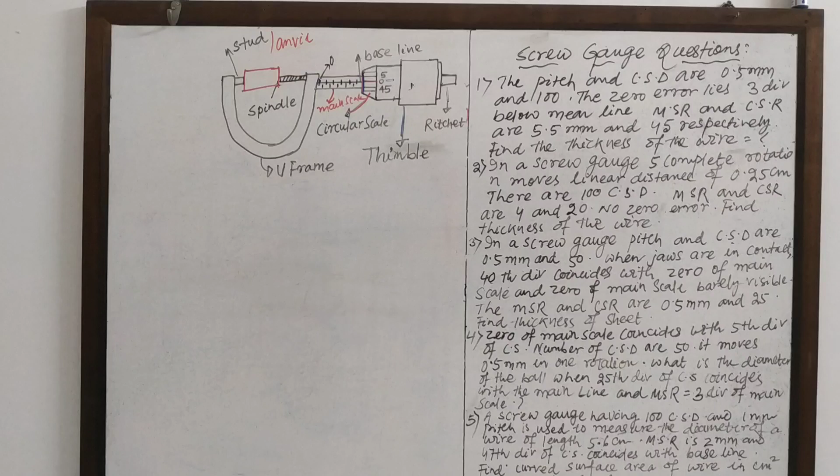Hello, today I will read screw gauge. Screw gauge is also an instrument which is used to measure the length or thickness of very thin bodies.

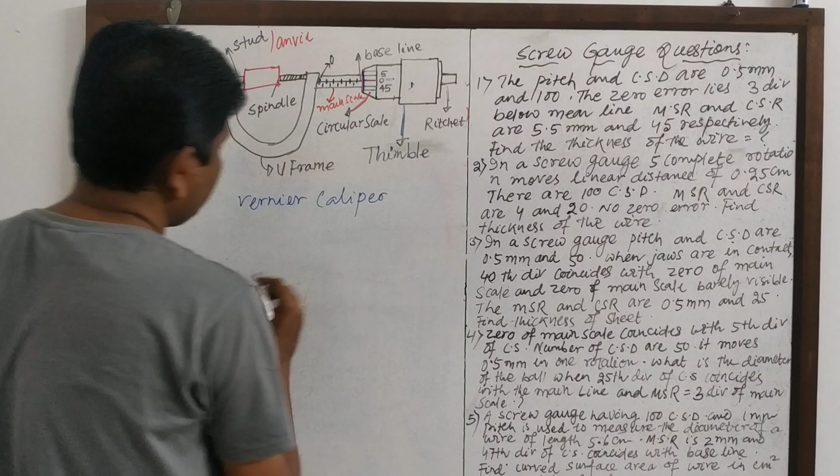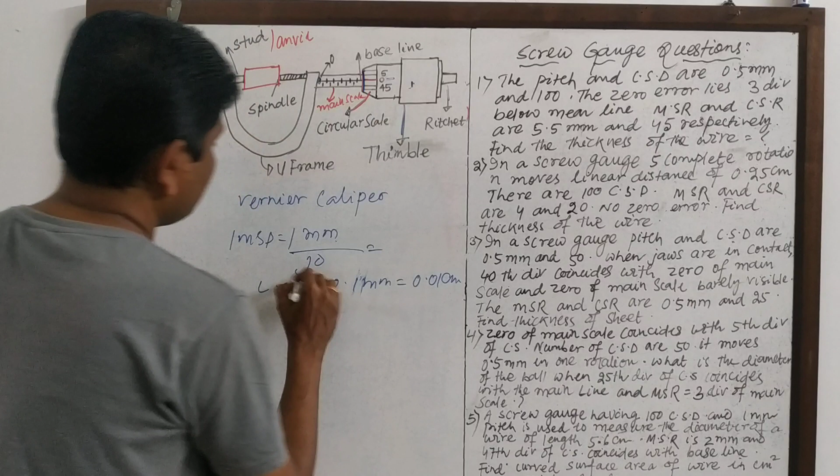Okay, think of the case of vernier caliper, where 1 mm, that is 1 MSD, is equal to 1 mm, was divided into 10 equal parts, and the least count was 0.1 mm or 0.01 cm. Further, we cannot divide 1 mm. It is divided into 10 parts.

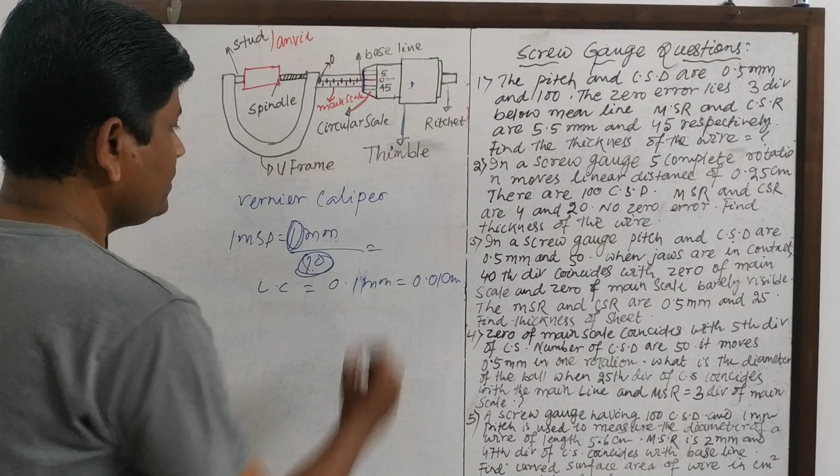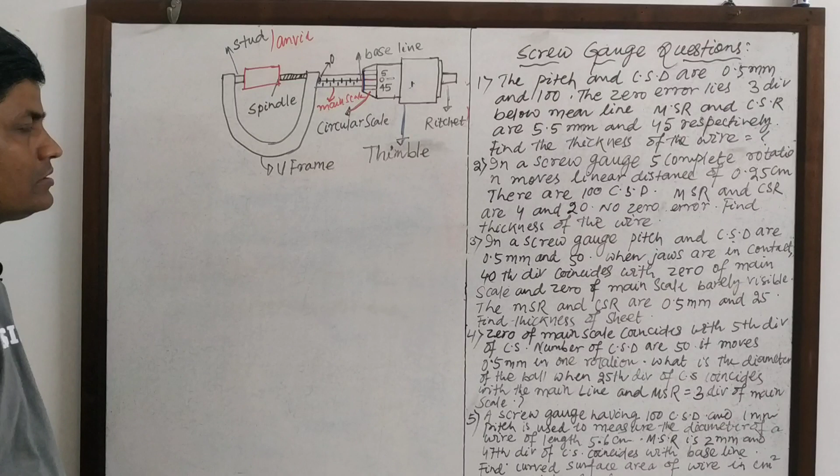If we divided 1 mm into 20 equal parts or 50 or 100 parts, then there will be very much difficulty in counting the least count or counting the length of the particular thickness of a geometrical body. In order to avoid these difficulties, screw gauge is used.

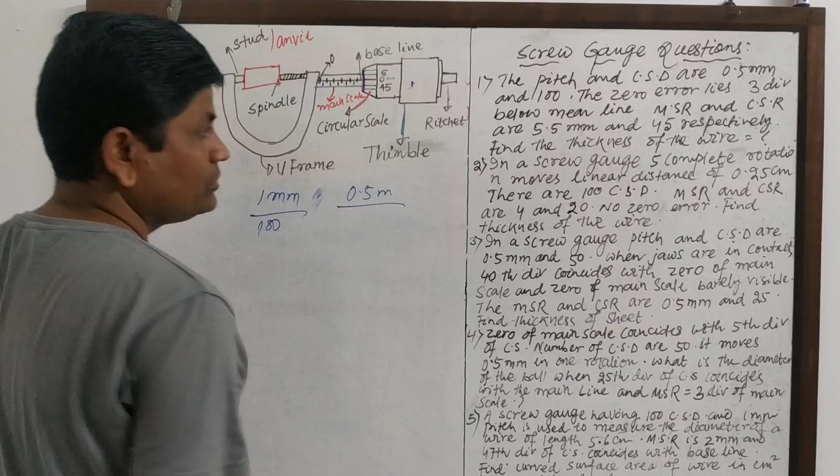A screw gauge can divide 1 mm into 100 parts or 0.5 mm into 50 parts. Okay. In both the cases, the least count, LC, will be 0.01 mm. Okay, that is 10 micrometer. How the least count will be calculated, we will discuss later.

Okay, so it can count up to 10 micrometer. So this is also called a micrometer. So screw gauge is also called micrometer because it can count up to 10 micrometer.

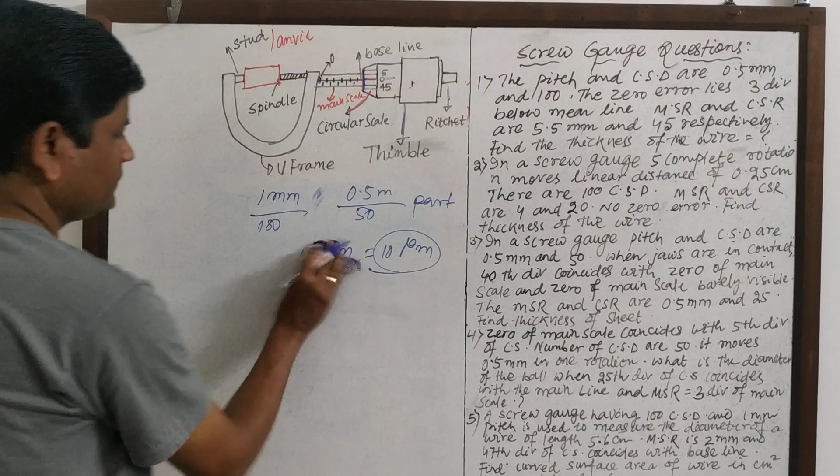Let's discuss a little about the morphology of the screw gauge. Okay, this is a metallic U-frame, and this is stud or anvil, and this is a spindle. Between this stud and spindle, the geometrical body whose measurement is to be taken is kept, and it is held by the two jaws of the U-frame.

This is called the circular scale. This is the circular scale, this is the main scale. Okay, and this line is called the base line. Here is the zero mark of the main scale, and here is the zero mark of the circular scale.

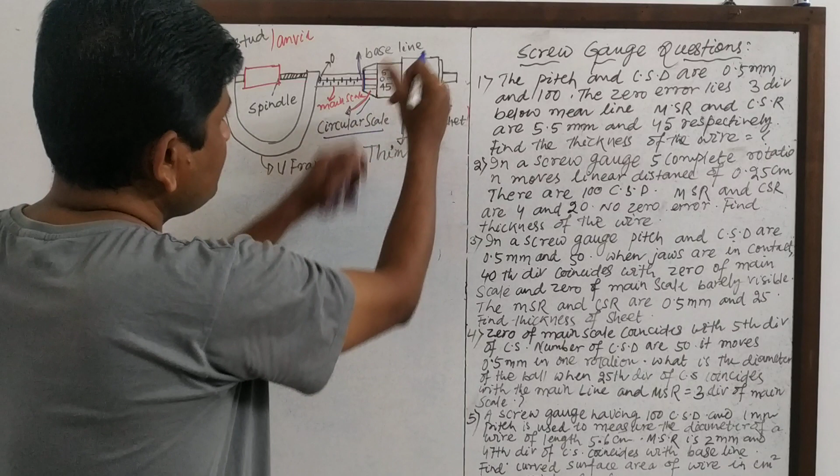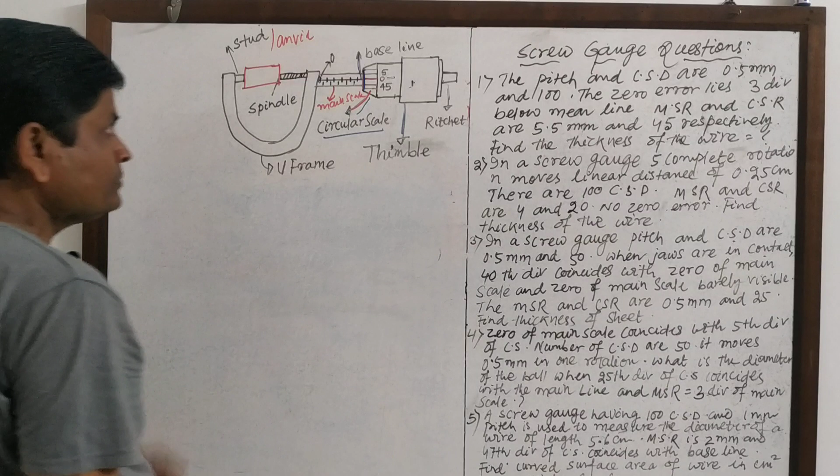This is called thimble. When the thimble is rotated clockwise, the mouth of the thimble or the circular scale moves towards the zero of the baseline. Okay, and when it is rotated anticlockwise, then it is loosened or it goes away from the zero of the baseline.

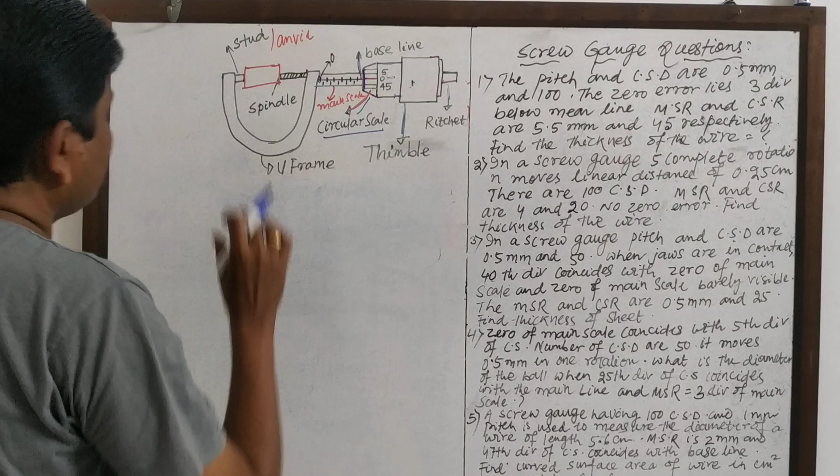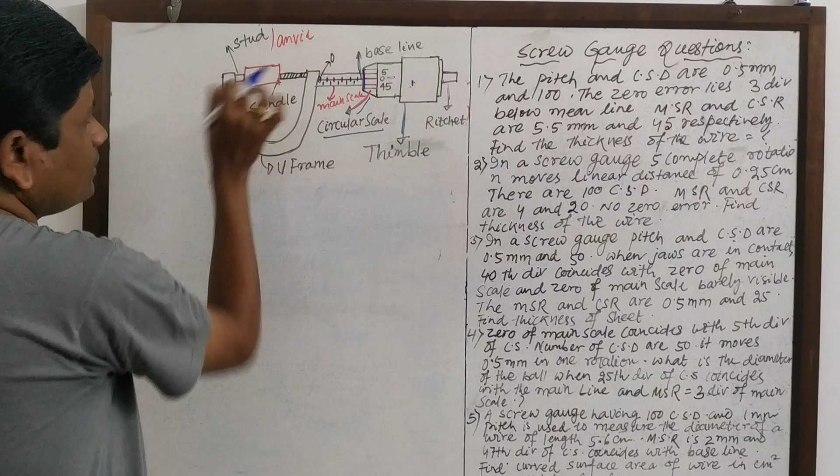Okay, this is called ratchet. The function of the ratchet is when the two jaws fix or tighten the material whose measurement is to be taken, the ratchet ensures that the spindle does not move further. In other words, the ratchet helps to fix the geometrical shape in between the jaws.

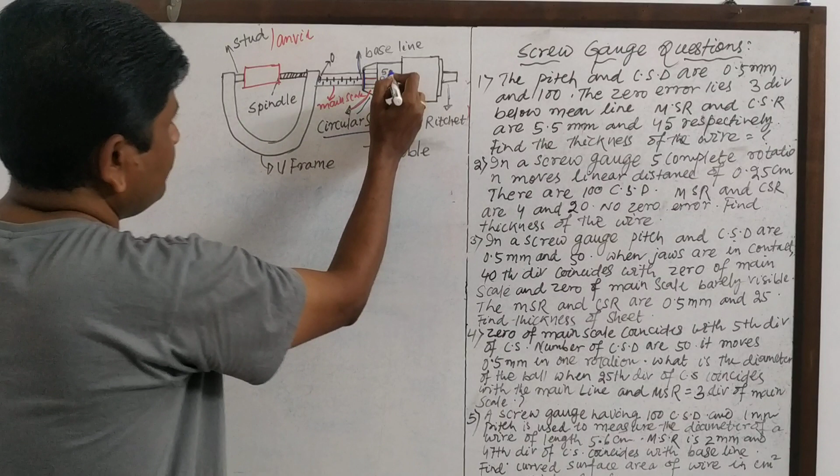Okay, now see, the zero of the circular scale coincides with the baseline. When it coincides with the baseline, then see, the 5 mark is above it and the 45 mark is below the 0. Okay, always remember this.

Then how to read, how the readings are taken. There are two readings, main scale reading and circular scale reading. How is the main scale read?

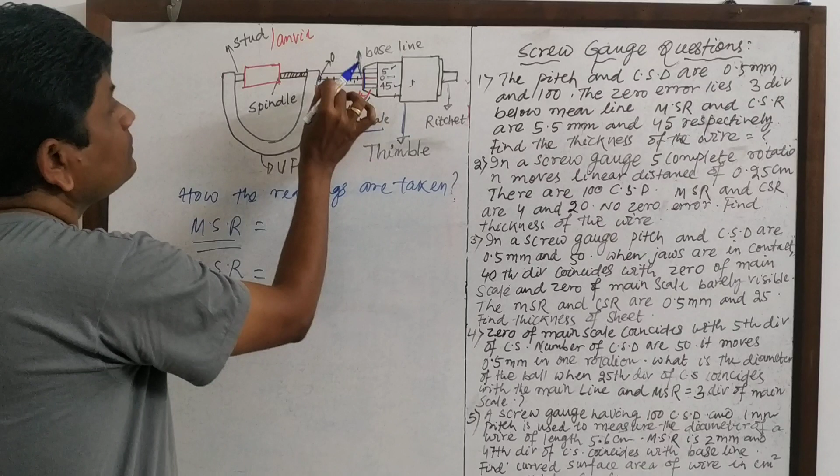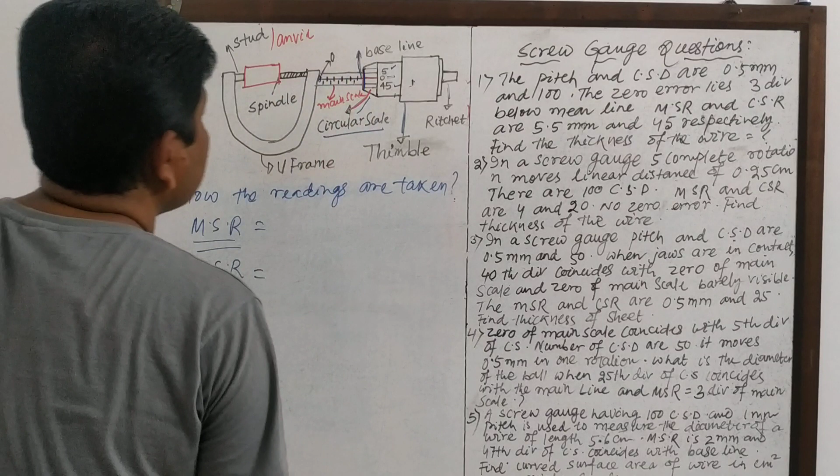When the geometrical shape or a thin sheet is inserted between the two jaws of the U shape, then the thimble is tightened, and mark and see which line of the main scale the mouth of the thimble crosses. Okay, let it cross the 3 MSD. Okay, 3 divisions, then 3 divisions into pitch.

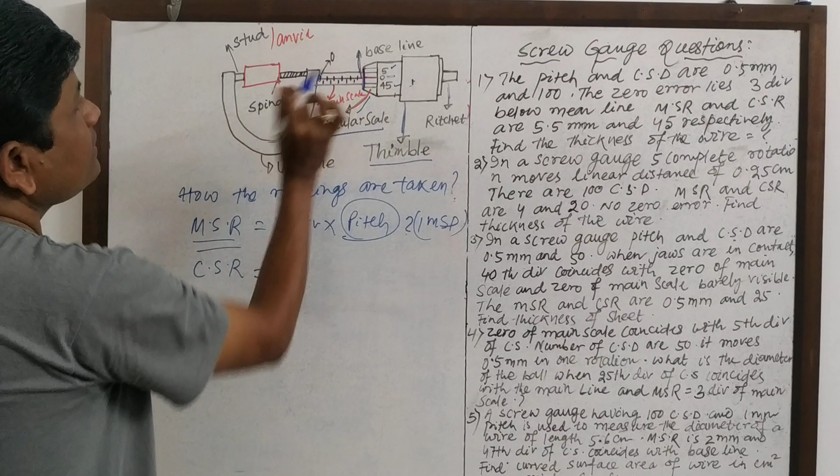What is pitch? Pitch is defined as how much distance it travels when one rotation of the thimble completes. When the thimble of this instrument completes one rotation, the distance traveled by the circular scale is called pitch. Okay, this pitch is generally equal to 1 MSD, 1 main scale division. In this case the 1 main scale division is 0.5, as you can see.

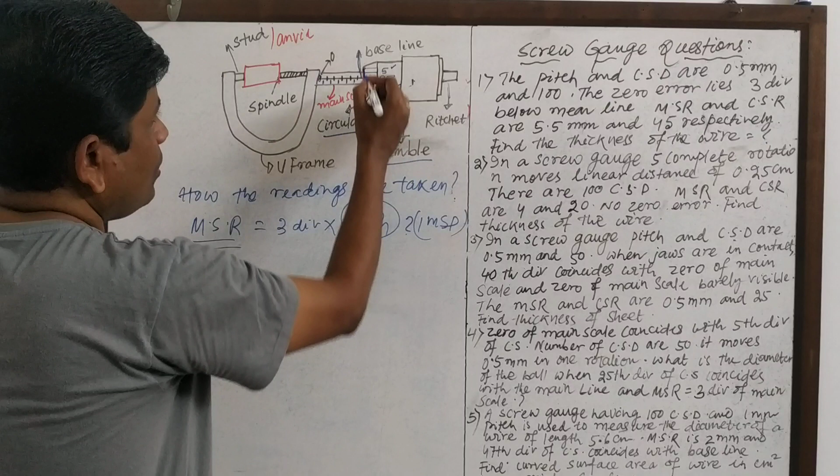Circular scale reading, how are circular scale readings taken? When the main scale reading is taken, then see which of the circular scale divisions coincides with the baseline or the main line or the pitch line. Okay, let in this case this is the 0 mark of the circular scale. It coincides with the baseline. Then in this case CSR is equal to 0.

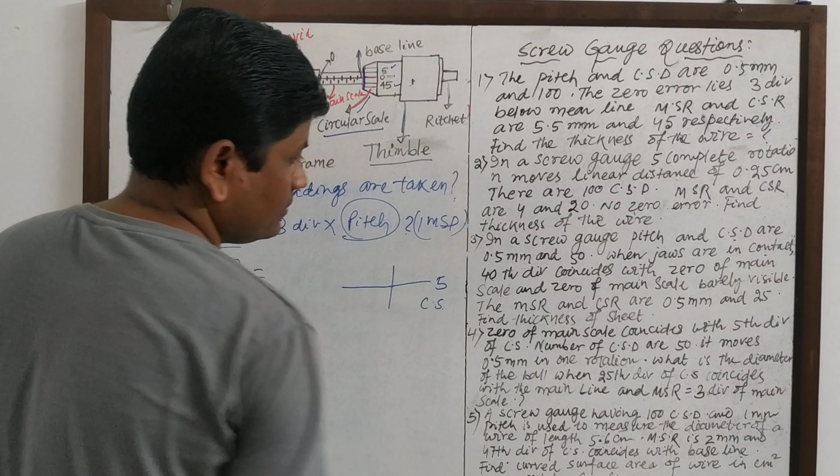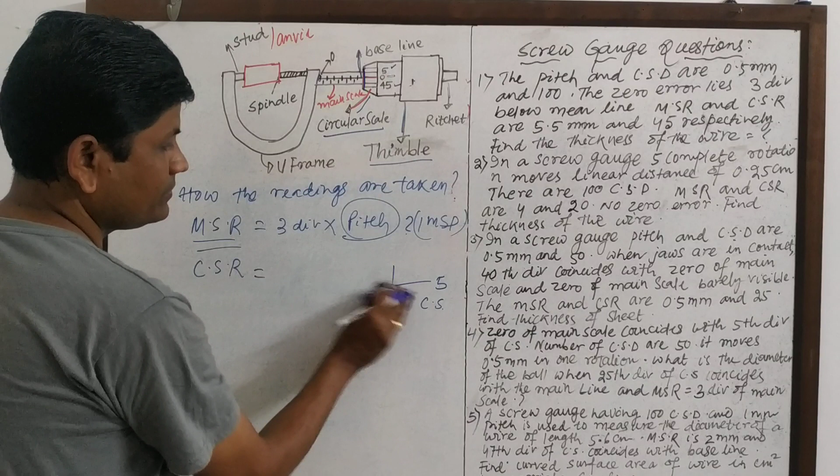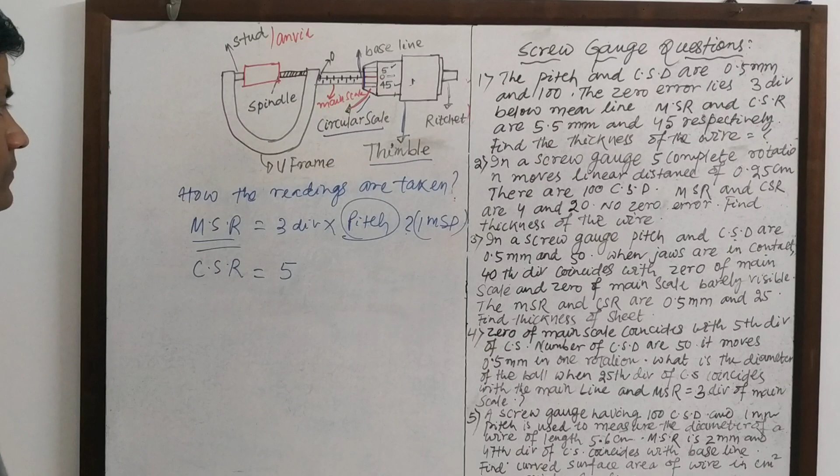When the 5 mark coincides with the baseline, then the circular scale reading is 5. Let in this case circular scale reading be 5. Okay, then CSR is equal to 5. How is the thickness of the metal sheet calculated?

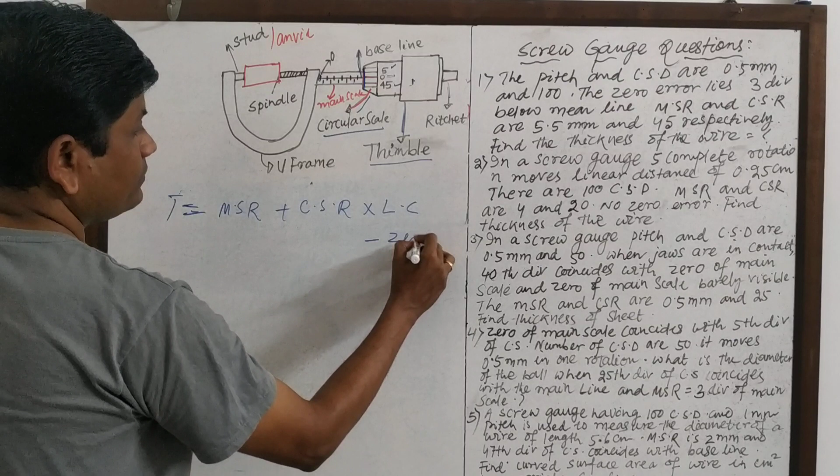Thickness T is equal to main scale reading plus circular scale reading into least count minus zero error. Okay, now we discuss the zero error. Zero error may be positive zero error or negative zero error, as in the case of the vernier scale.

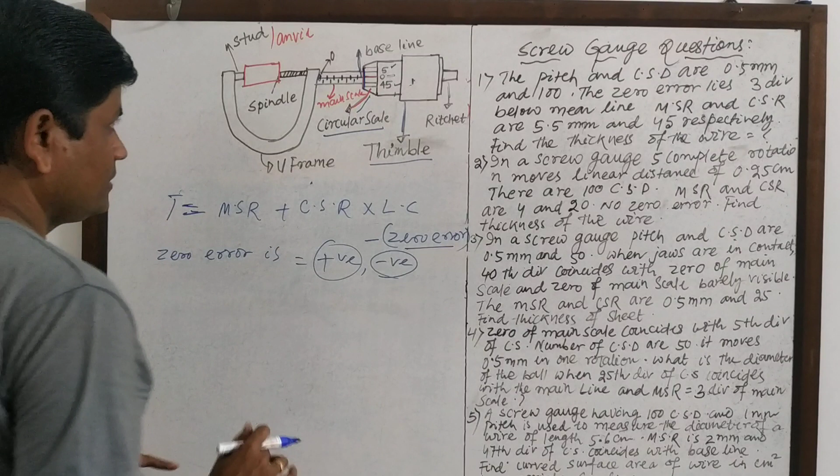Okay, positive zero error occurs when the two jaws, the stud and the spindle, touch each other and there is no movement, but the main scale still shows a positive reading. In this case, let this be the circular scale. This is the main scale, and this is the zero of the main scale.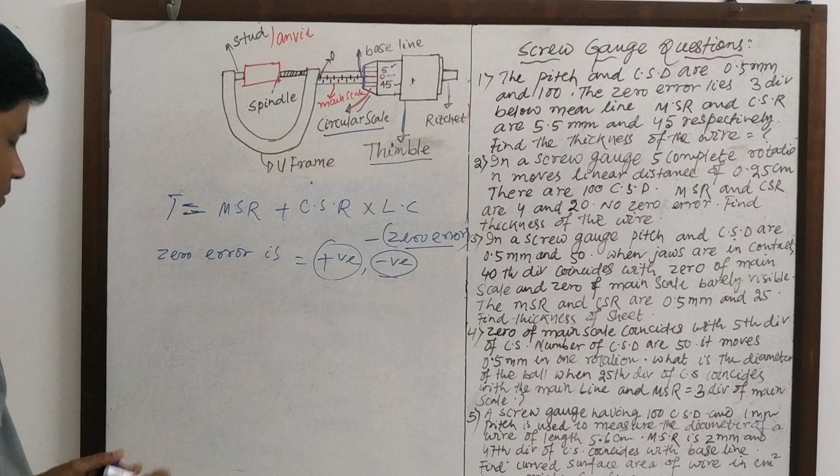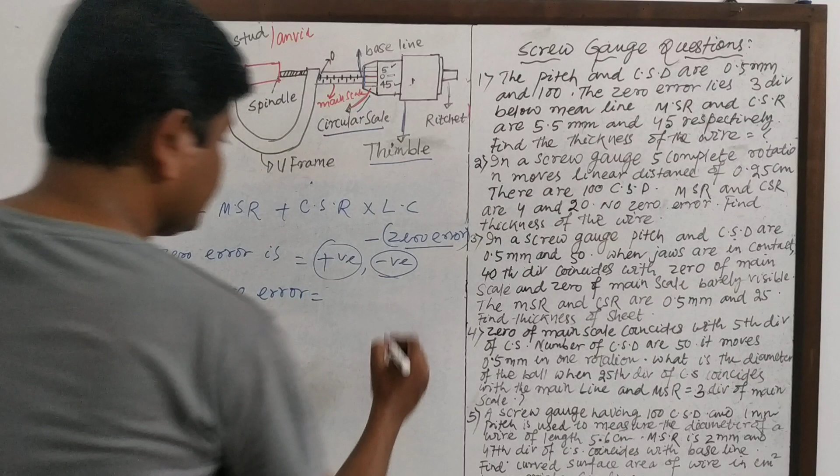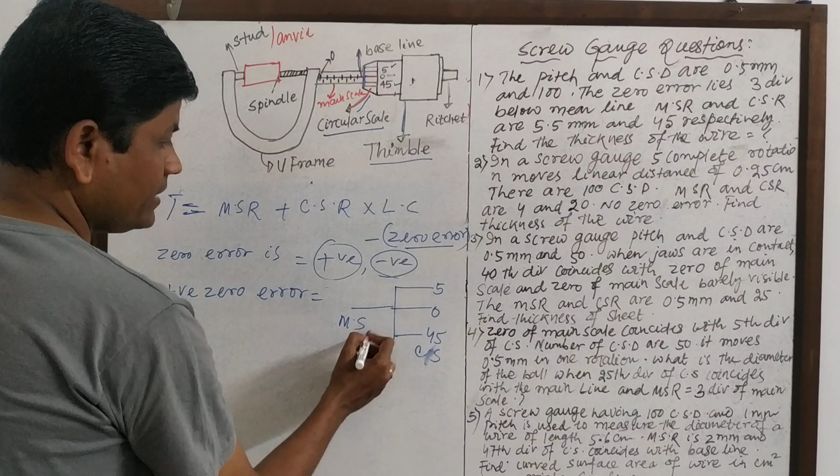Positive zero error. How is positive zero error measured? Let this be 0, this the 5 mark, and this the 45 mark. This is the circular scale, this is the main scale. Positive zero error occurs when the 0 mark is under the baseline of the main scale. In this case, this will be 5 and this will be 0. When 0 is below the main scale baseline, it is called positive zero error.

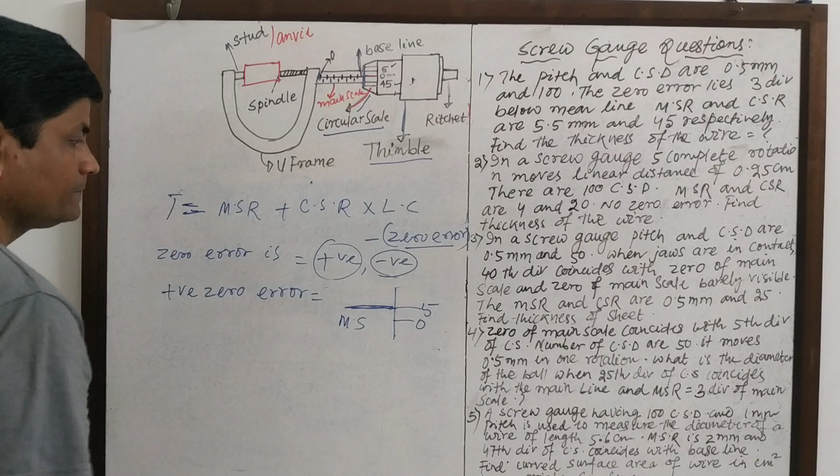This is the 5 mark, this is the 0 mark. When the 0 mark of the circular scale is below the baseline of the main scale, in that case this will be the positive error.

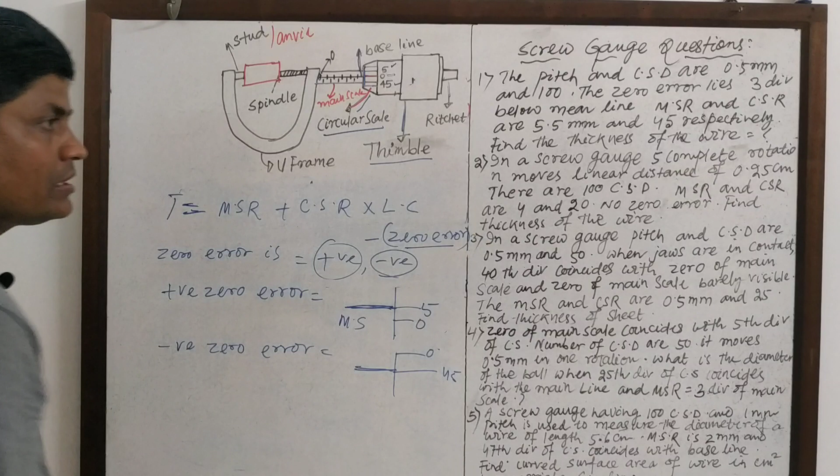Negative zero error. This is 45, this is 0, this is the baseline. When the 0 of the circular scale division is above the baseline, this is negative zero error. Now it is clear about zero error.

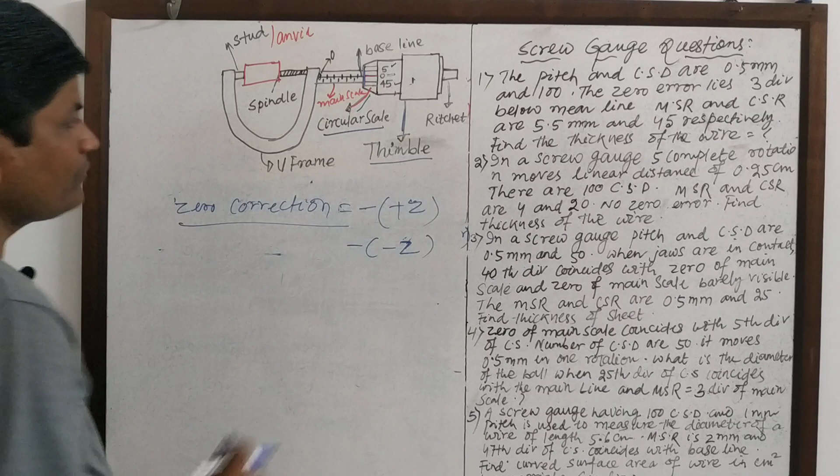What is zero correction? Zero correction is minus positive Z or minus negative Z. Zero correction in case of positive zero error is minus plus Z, in case of negative, minus minus Z, and this zero correction is added in the final measurement.

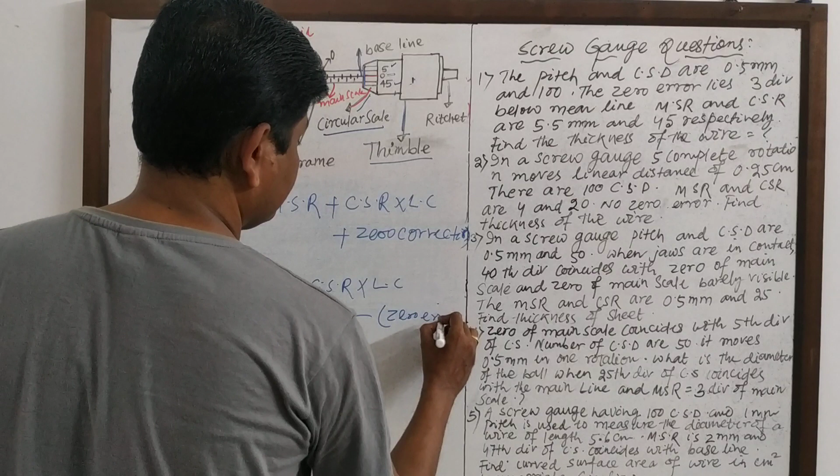Now the formula of the thickness is main scale reading plus circular scale reading into least count plus zero correction, or MSR plus CSR into least count minus zero error, with proper sign. In case of positive it is positive, in case of negative zero error it is negative.

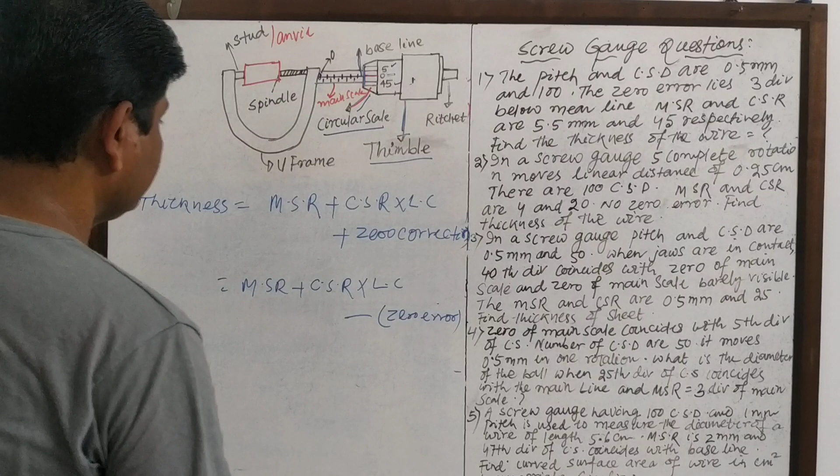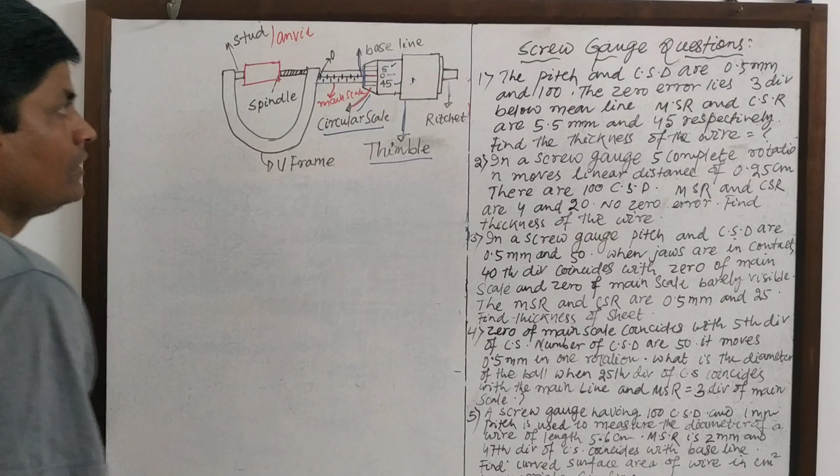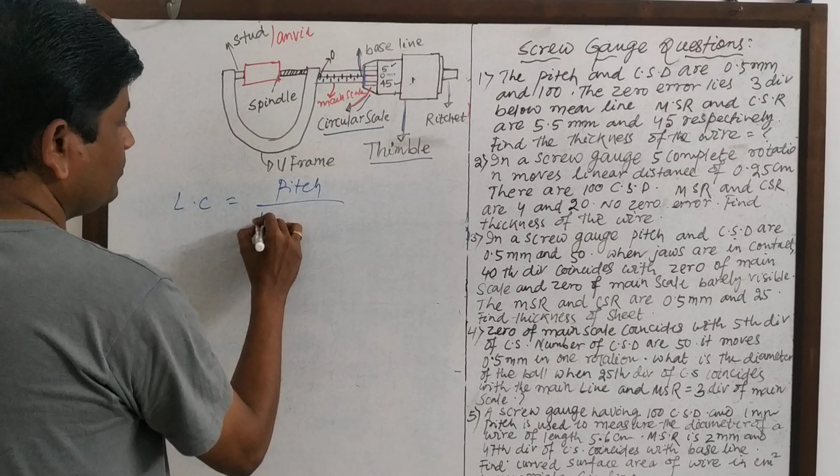Now some screw gauge questions. The pitch and the number of circular scale divisions are 0.5 and 100. The zero error lies 3 divisions below the main line. MSR and CSR are 5.5 mm and 45 respectively. Find the thickness of the wire. First we have to find the least count. Least count is equal to pitch by number of circular scale divisions.

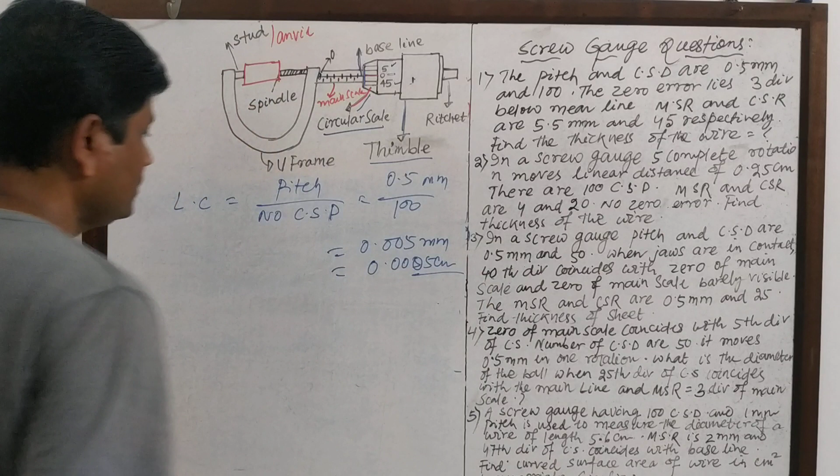Here the pitch is equal to 0.5 mm and the number of circular divisions is equal to 100. In this case the least count is 0.005 mm, or 0.0005 cm. Now the zero error lies 3 divisions below the main line. This is the main line. Zero error lies 3 divisions below the main line.

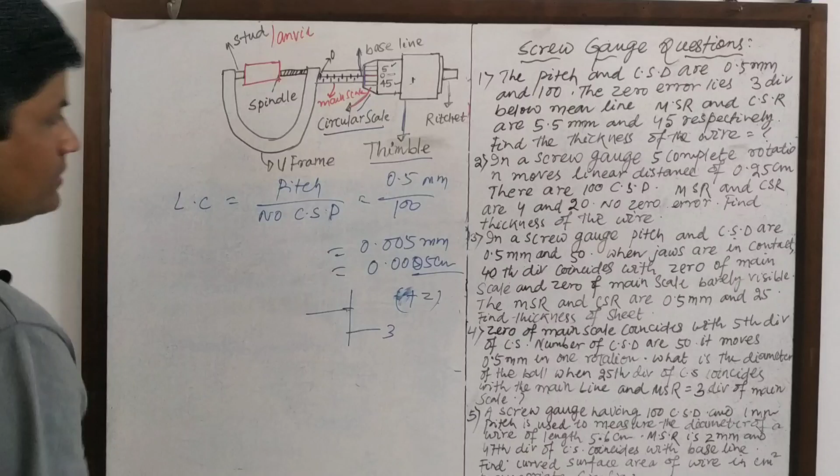3 divisions below, that is, this is what? Positive zero error. This is positive zero error. The zero of the circular scale lies 3 divisions below the main line. Is it clear? This is the baseline or the main line, and the zero of the circular scale lies 3 divisions below the baseline. Now we have to calculate the zero error.

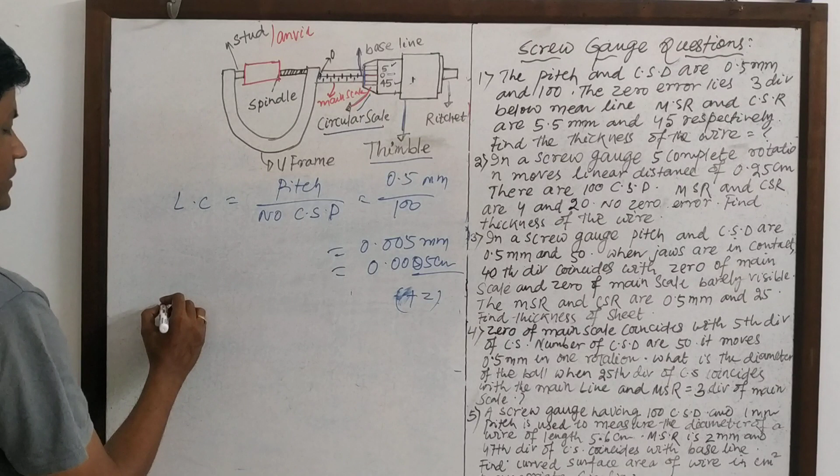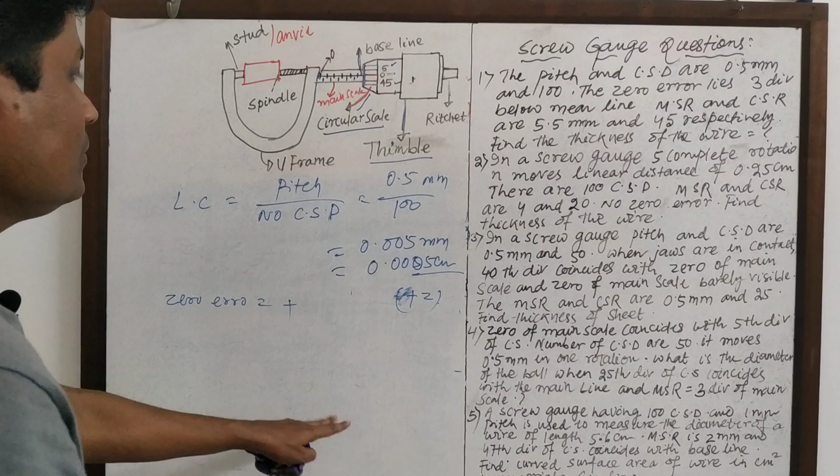Zero error is positive, as it lies 3 divisions below the main scale. Positive zero error is equal to 3 into least count, and 3 into 0.005 is equal to 0.015 mm. Remember this. Thickness T is equal to main scale reading 5.5 mm plus circular scale reading 45 into least count.

Minus zero error. Zero error is positive, so 0.015 will be subtracted. Then 5.5 plus 45 into least count 0.005 minus 0.015 mm. This is equal to 5.5 plus,

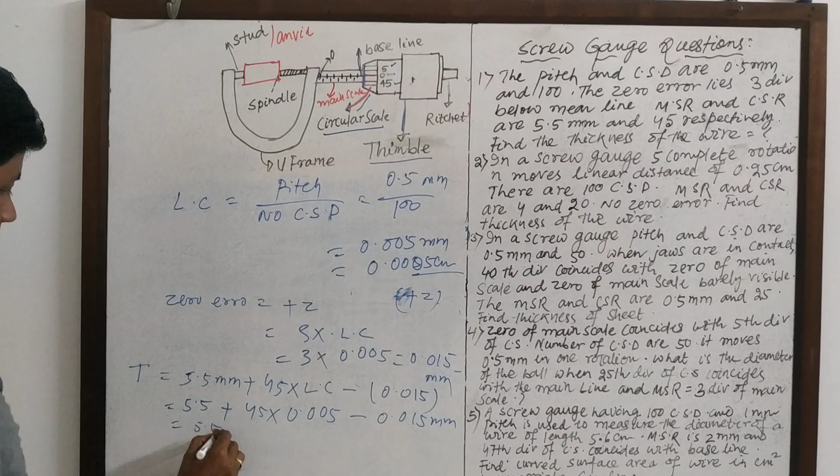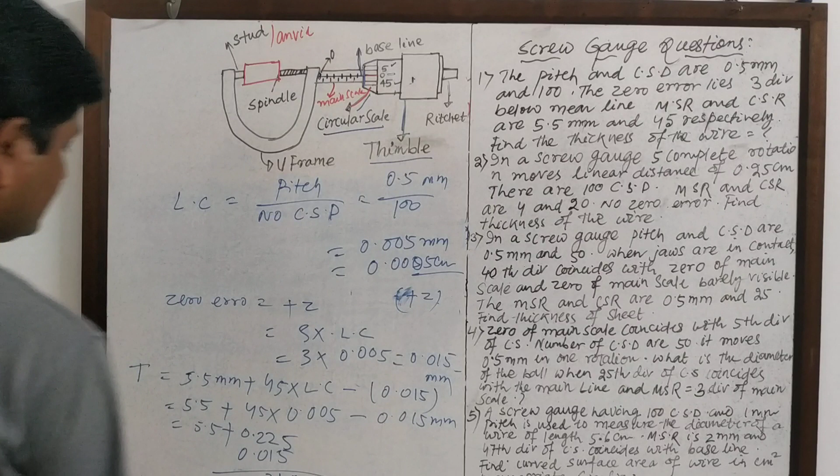what will this be? This will be 0.225, minus 0.015. Then the total reading will be 5.5 plus 0.210, which is 5.710 mm. Clear? Then the second.

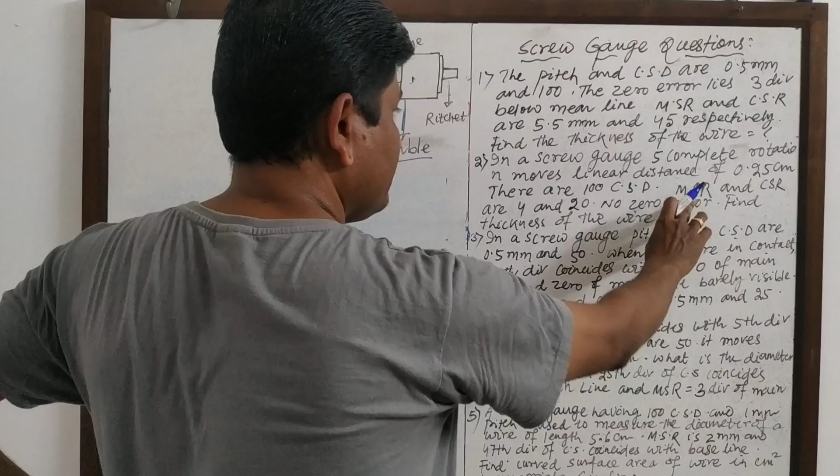In a screw gauge, 5 complete rotations move a linear distance of 0.25 cm. There are 100 circular scale divisions. Main scale and circular scale readings are 4 and 20 divisions. No zero error. Find the thickness of the wire. Thickness is equal to main scale reading plus circular scale reading into least count minus zero error.

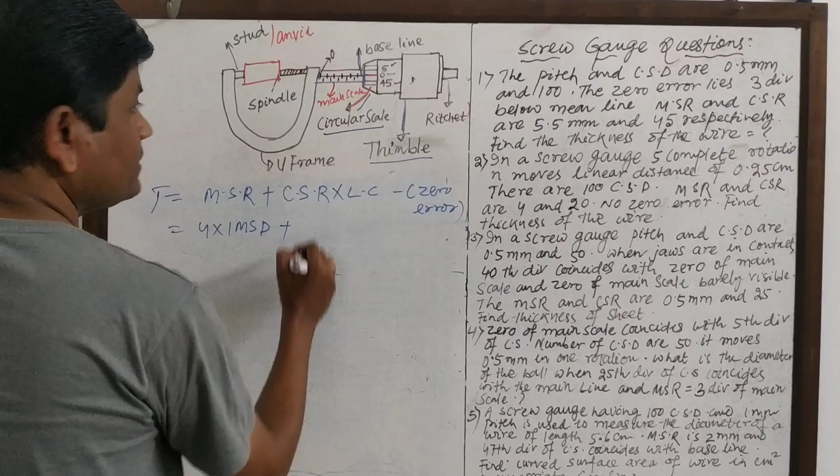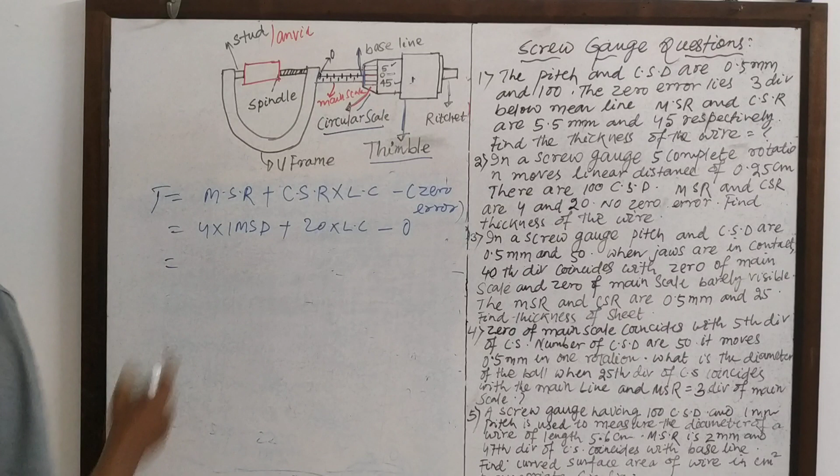Main scale reading: 4 divisions are moved, so 4 into 1 MSD. Circular scale reading is 20 into least count, minus 0, there is no zero error. Now find 1 MSD. 5 complete rotations equal 0.25 cm, so 1 rotation is equal to 0.05 cm.

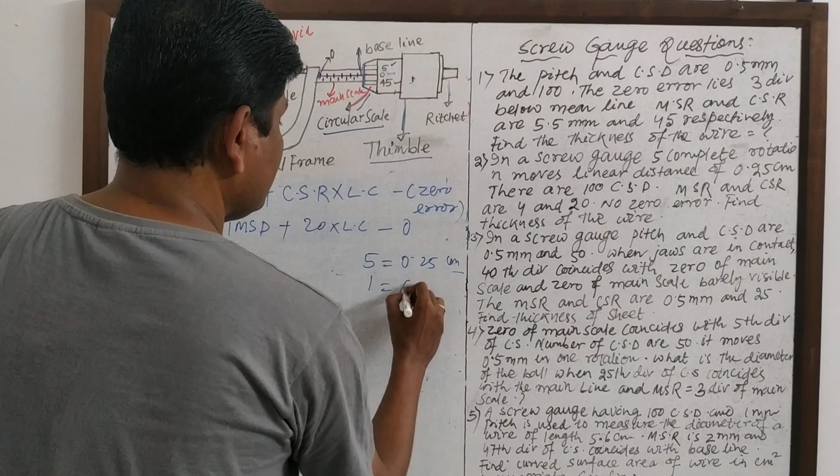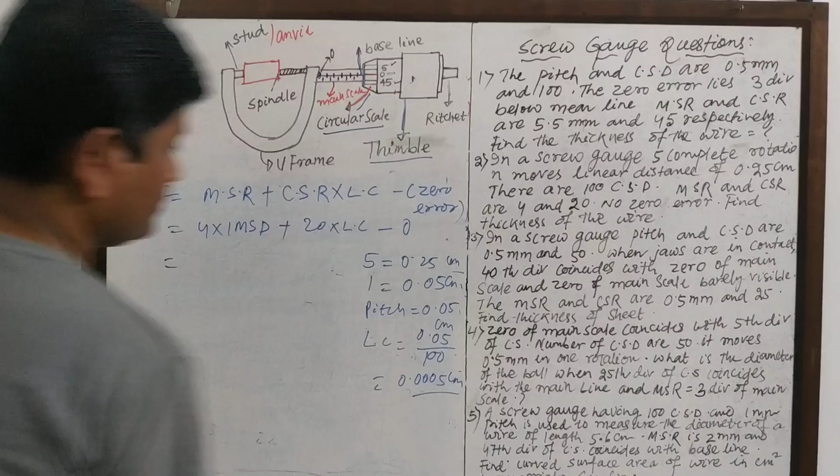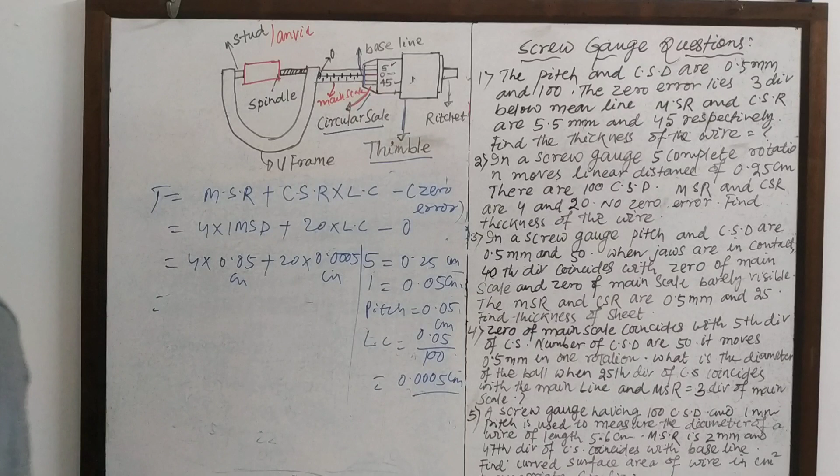Pitch is equal to 0.05 cm. Least count is equal to 0.05 by number of divisions, 100, which is 0.0005 cm. We have found the least count. 1 MSD is equal to 1 pitch, so 4 into pitch 0.05 plus 20 into least count 0.0005 cm. 4 into 0.05 is 0.2 cm.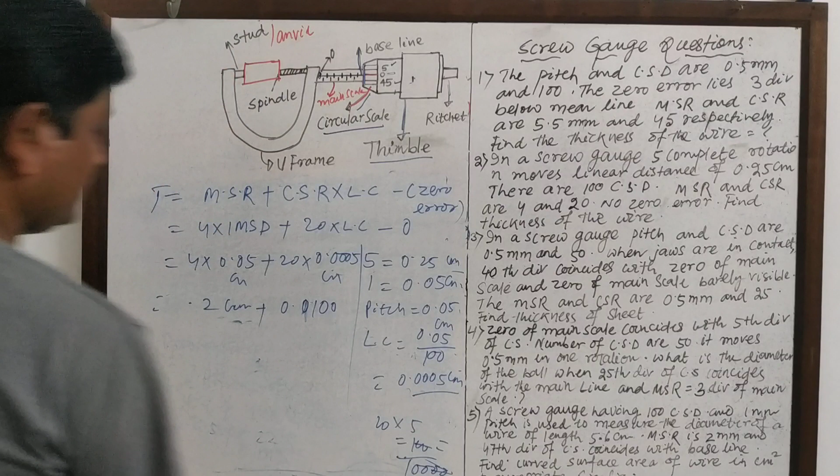This is 0.2 plus 20 into 0.0005, which is 0.0100. That is 20 into 5 is 100, giving 0.01. Is it okay? So this is 0.2 plus 0.0100 cm, equal to 0.2100 cm thickness.

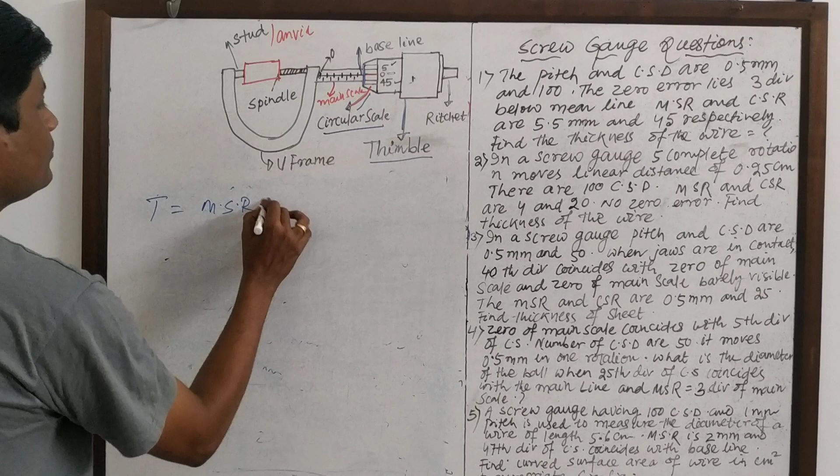Now number 3. In a screw gauge, pitch and CSD are 0.5 mm and 50. When jaws are in contact, the 40th division coincides with the 0 of the main scale, and the 0 of the main scale is barely visible. The MSR and CSR are 0.5 and 25. Find the thickness. The same formula will be applied: main scale reading plus circular scale reading into least count minus zero error.

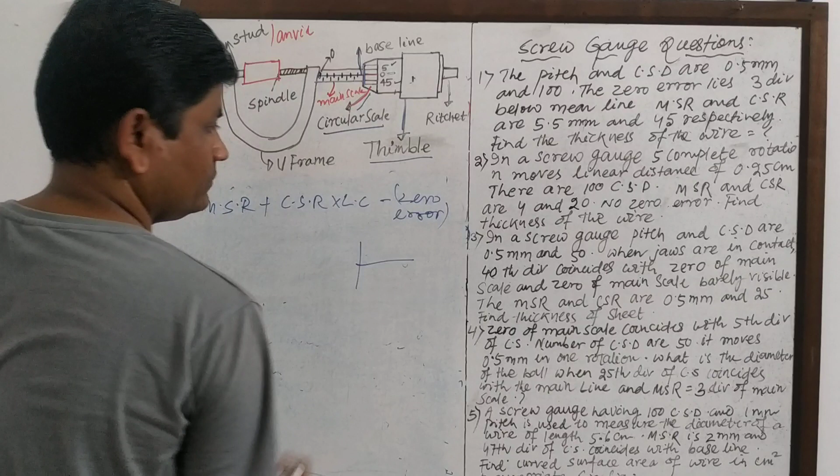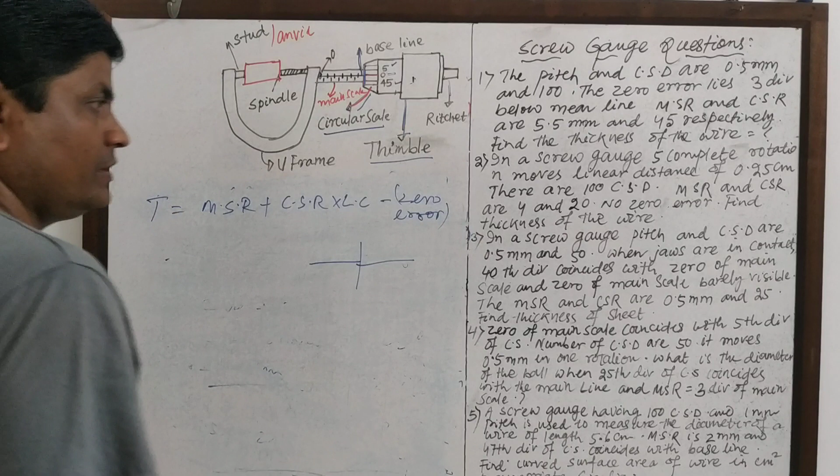Look, when the jaws are in contact, the 40th division coincides with the 0 of the main scale, and the 0 of the main scale is barely visible. Now this is 40, and the 0 will be here. This is negative zero error. In case of negative zero error, the total number of circular scale divisions here is 50, so it is 50 minus 40 into least count.

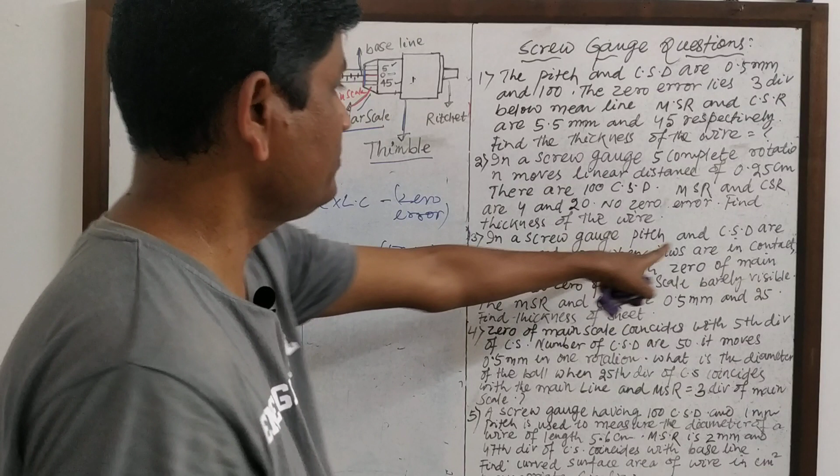Find the least count. Least count is equal to 1 MSD, the pitch, 0.5 mm, divided by the number of circular divisions, 50. This is equal to 0.01 mm. Now put in the formula. MSR is 0.5 mm plus CSR 25 into least count 0.01, minus negative zero error, where minus z is equal to 10 into 0.01 mm. Is that clear?

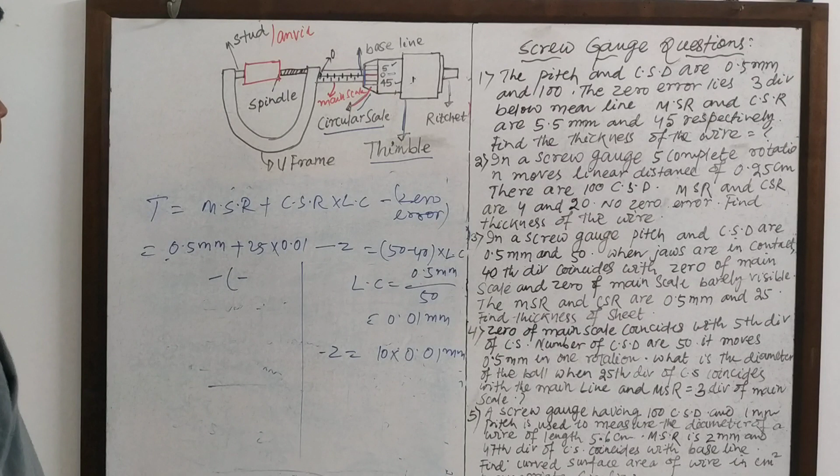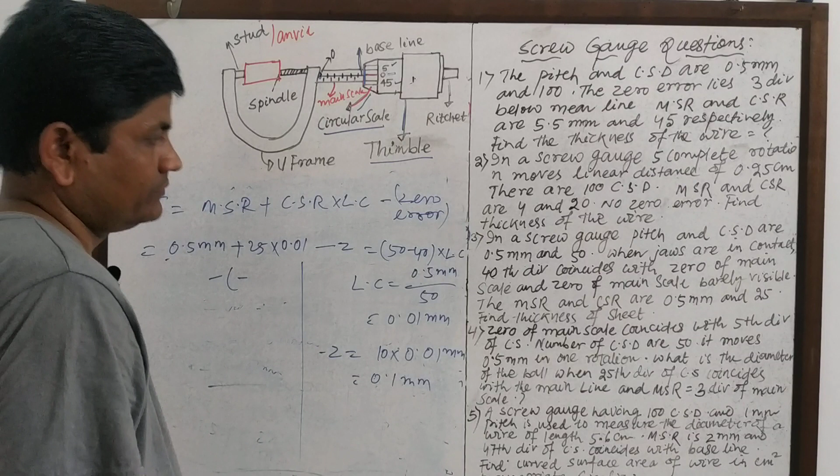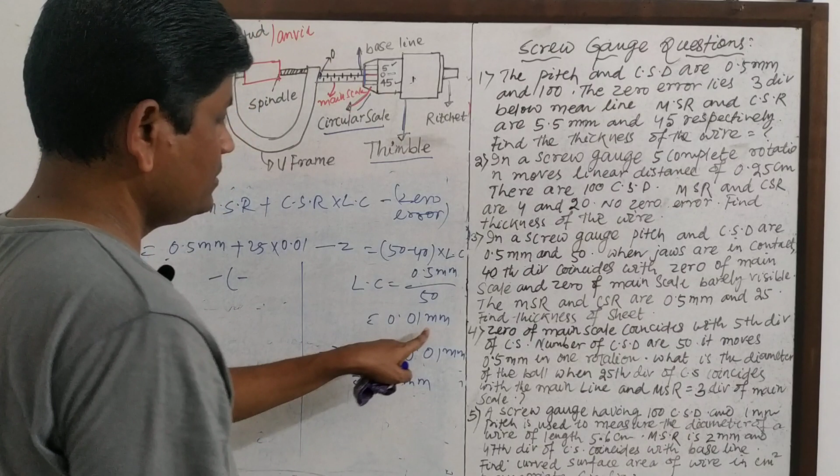Am I right? Minus z is 50 minus 40 into least count. Least count is equal to pitch by number of divisions, and the number of divisions is 50, so 0.01 mm. 10 into least count is equal to 0.1 mm.

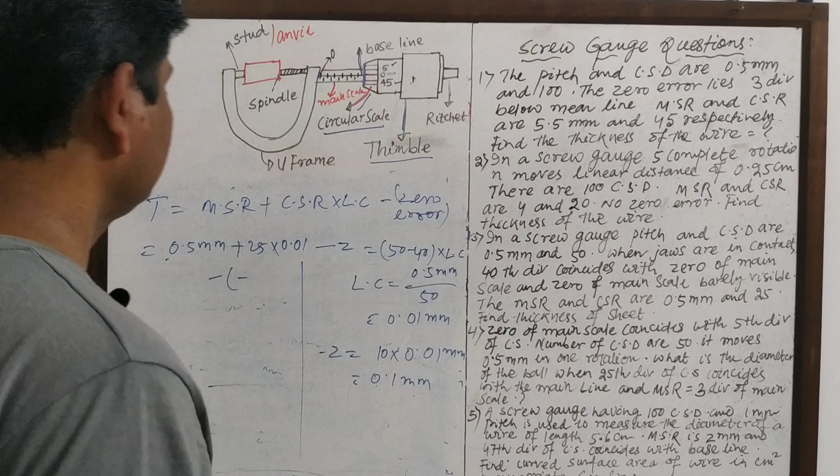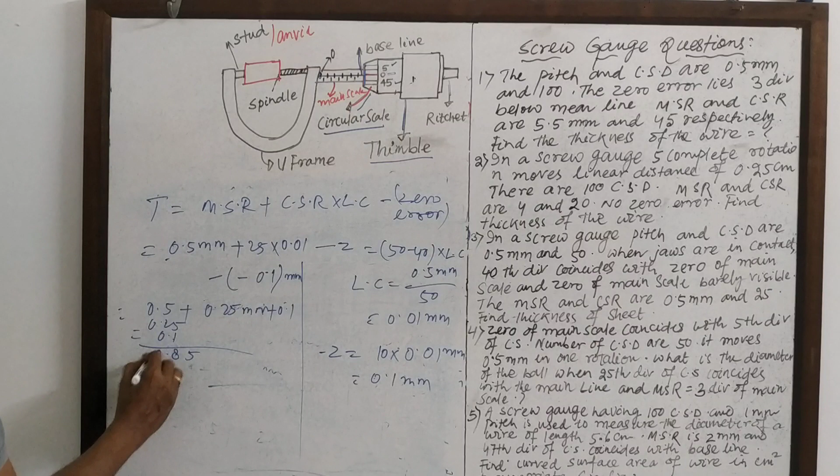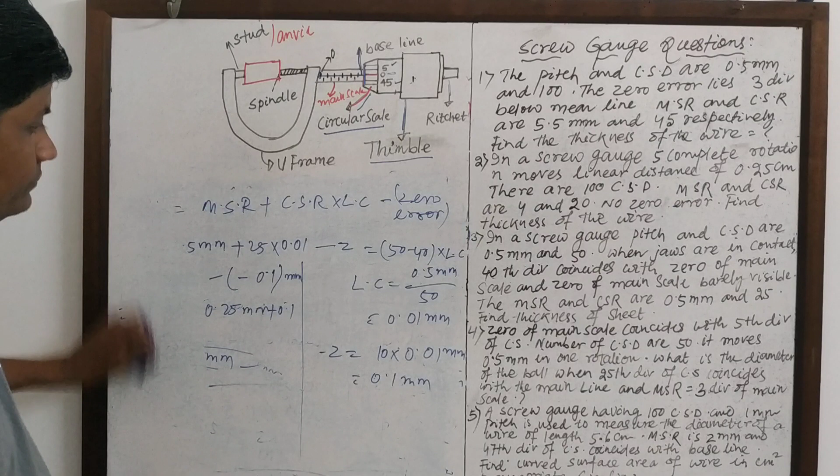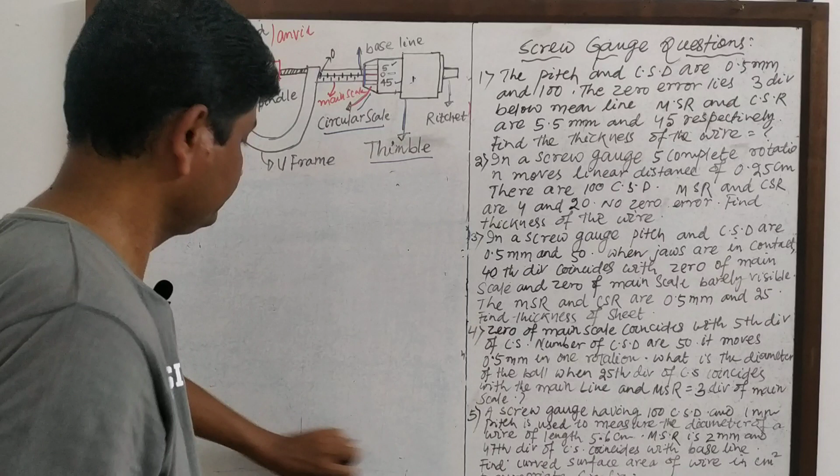0.5 plus 0.25 mm plus 0.1. This is equal to 0.85 mm. Thickness is equal to 0.85 mm. And numbers 4 and 5 are for you to try.